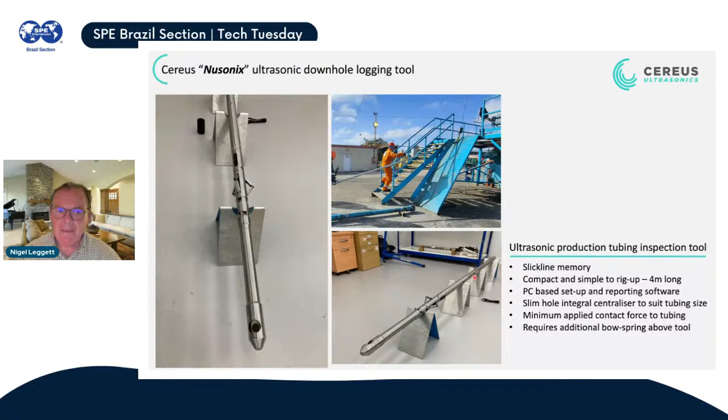So this is the actual hardware I'm going to talk about today. So it's a very simple slickline memory tool, 4 meters long. We're typically running with 2 batteries, so it's 5 meters long. The principles of its operation are similar to other ultrasonic tools that you're probably familiar with, which are bigger. We have one rotating ultrasonic transducer. This rotates at 3 revs per second, 180 RPM, and emits a pulse 60 times every revolution.

So it's the time of flight of that energy hitting the tubing wall or the casing wall, and the return. The time of flight will give us the internal radius. Simultaneously, that energy goes into the casing or the tubing wall and starts to resonate. And we get reflections coming back. That's in the time domain. And in the frequency domain, we get several of these peaks. And it's in the frequency domain we use the resonant frequency of that tubing and casing, which will give us the thickness, the absolute thickness of that tubing.

I'll go into the unique proposition of Cereus, because this is typical science of the ultrasonics tools, but the Cereus is unique in the way we actually manipulate our signals. The unique proposition of Cereus is the high fidelity ultrasonics we've achieved. Over here, this is probably an ideal signal which we would want to emit from a transducer. We would ideally want a broad band, so we're actually working between 500 kilohertz, typically up to 3 megahertz. We are going higher now, and that will give us a broad band response, allowing us to do high energy.

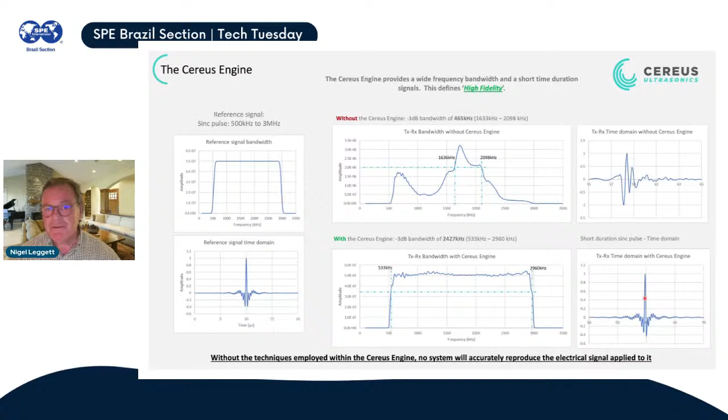Everything we do in Cereus is a direct measurement, and none of it's derived. We work with direct measurements. Now, this is just an example of a raw data set, so I'll try and explain what we've got here.

I mentioned that we rotate that transducer at 3 revs per second. Every rotation, we do 60 shots. This red line is one of those 60 shots followed over 160 revolutions. So basically 3 revs per second is about 50 seconds of data as we pull out the hole. This is time of flight along the bottom here on the x-axis.

And what we get is this is the time of flight of that first pulse hitting the tubing wall or casing wall and coming back. So that's my high intensity first return coming back. And as you can see, as we pull out the hole, we get to that point, which is a joint, and we go into a perforated joint in this upper section here. As you can see, this joint is slightly later in time, so it's going to be a slightly bigger internal diameter.

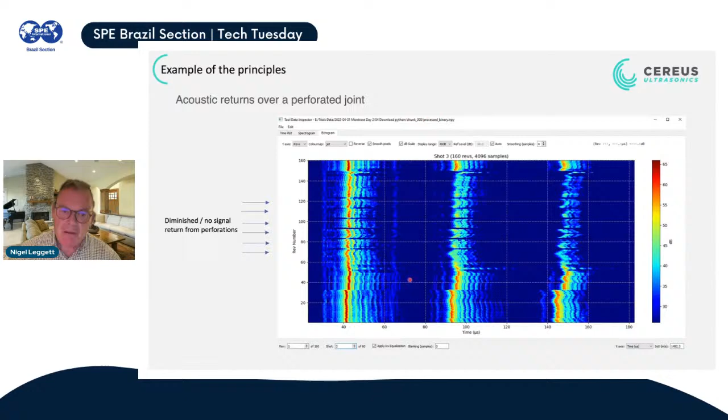So as an ultrasonic tool, we've got some case studies showing it as an alternate solution to the internal inspection of tubing and casing compared with a multi-finger caliper. Our first job was done for Total offshore, and this was a slot recovery. So inspection of a 9 5/8 casing in the upper section, where it was roughly about 65, 67 degrees, where they had already done 3 side tracks, so they were very concerned about rotary wear.

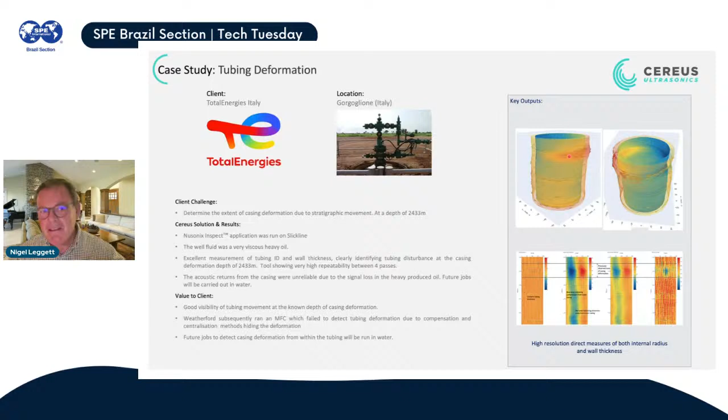And this was not detected with a multi-finger caliper because of the geometry of where the centralizer is relative to the transducer. Ours is offset by probably about 200 millimeters, which allows you to follow these distortions, whereas if you've got a multi-finger caliper, these tend to actually centralize on the fingers, and as a result, these types of distortions are very rarely detected. So this is the tool we're running in its basic mode of tubing and casing inspection to a very high degree of resolution.

The step change in this tool was its ability to become a cement evaluation tool. And it's exactly the same tool as we've been using for the tubing and casing inspection. I put this slide up because basically whenever you take a new technology to the oil field, there's always skepticism. And what we're saying about our tool is it works in the same manner. It uses the same theory as the existing ultrasonic imaging tools which have been run for the last 30-odd years in the industry.

And this is just one extract showing the principles of the existing tools on the market. You've got one rotating transducer, similar to ours, and that rotating transducer's performance and frequency response is matched to the casing thickness, because that casing thickness will resonate at a frequency. The thicker it is, the lower the frequency, and the thinner, the higher the frequency. So we select the frequency response of a transducer to fit the thickness of the casing.

This is typically the frequency range these tools run at, typically 300 to 500 kilohertz. Quite a relatively narrow band, and this is the typical response you get from a narrow band. If you remember what I showed you earlier, the wider the bandwidth you can get out of the tool, the higher the frequency you can get, the cleaner the signal. So this is typical: in the time domain, you get the pulse, the travel time, and the first reflection. Then you take a Fourier transform of that reflection into the frequency domain and get its resonant frequency. That resonant frequency allows you to determine the thickness.

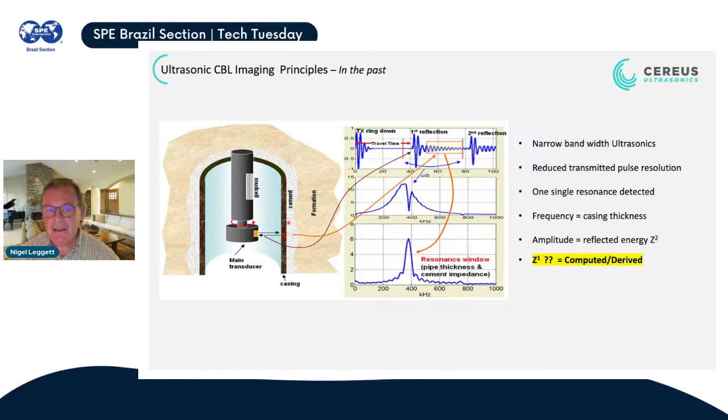So what they typically do in low bandwidth tools is take a window of these back reflections, put it into a Fourier transform and get a resonant frequency, once again the same resonant frequency as from the casing, and a combined energy level. And from that they can determine, through computations and derivations, what the material is on the back of the casing. So that's the principles today of the existing tools.

And the decay of those reflections in energy level is directly proportional or directly derived from what is sticking on the back of your casing. So if we've got water or gas, there'd be very low decay. If we've got cement, there'd be a high decay, because the cement will pull the energy out every time you get the energy hitting that back face.

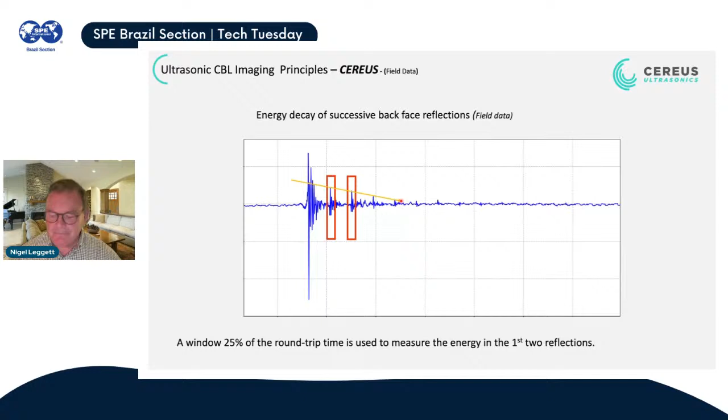Now, we've successfully used this in a number of applications. I've just shown you some samples which have undergone a hydraulic local expander. This is a technique which was developed with Shell and by Shell to close off microannuli. So it's a hydraulic tool, it's running on wireline, and actually it swages the inner casing out, compressing it in the cement to close off the microannulus.

So this is just an example of a 4.5-inch tubing in a 7-inch. These samples, they induced a microfracture. They flowed fluid through this microannulus. They then applied 3 expansions, and you can see here where they reintroduced in brown a good bond, and that was enough to seal. So this is just zooming in on that.

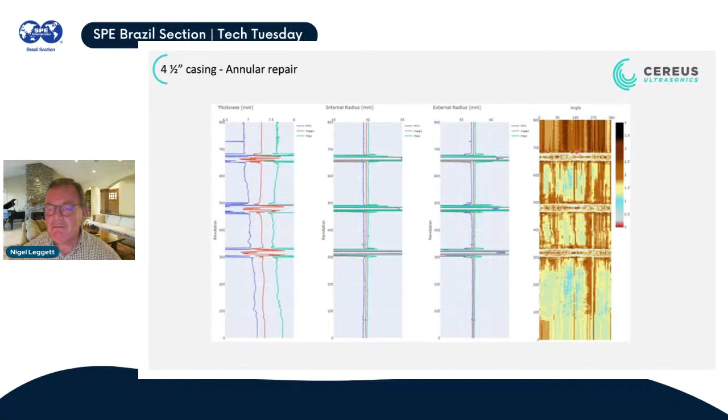We get a good trace of thickness. I'll explain these sharp points here in a minute, but basically we see a reduction in the casing thickness at that point as it's stretched and deformed, and likewise we see an increase in internal radius. And this is the resulting cement evaluation log, with the increasing of the bond or the well integrity sealing off the tips and the roots of each expansion. Just zooming in on that, you can see the red is the good bond, and what we've got is good bonds at the base of those tips and on the tips.

At the slopes, we get erroneous data, and that's what's caused those sharp peaks either side of the data set. And that's because our pulse is not coming back to our tool. Because it is at an angle, it's getting reflected and ricochets off, missing our transducer. So we fail here to get any results, but we can clearly see the seals being produced by this expansion technique.

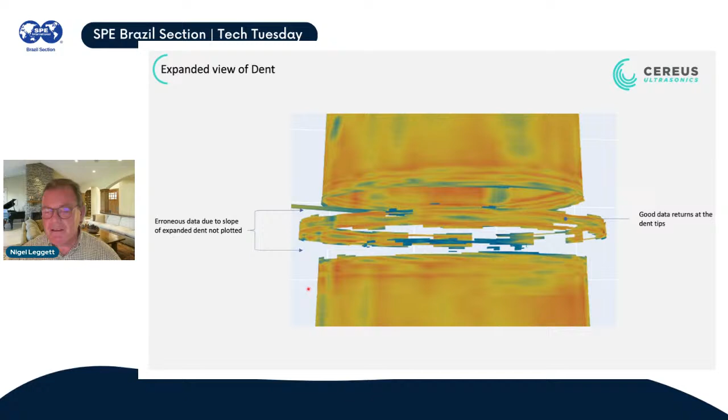Likewise, this same tool has been run in what's called the NORCE trials. This is a project in Stavanger, which is backed by numerous operators, looking at the various techniques of cement evaluation specifically and well integrity of cement for P&A operations. So this is just a direct comparison of a well-known existing tool and our tool here, the Cereus tool.

This was done 5 years ago, and the casing was pressured up to reduce the microannulus. It was pressured up to 40 bar. Ours was done at atmospheric, so we would typically see less of a bond than we would when it was under pressure. And the other thing, this sample has been repeatedly pressured up and exercised, so we wouldn't typically expect that cement bond to be the same. But there's just 2 samples of a like-for-like match with existing technology.

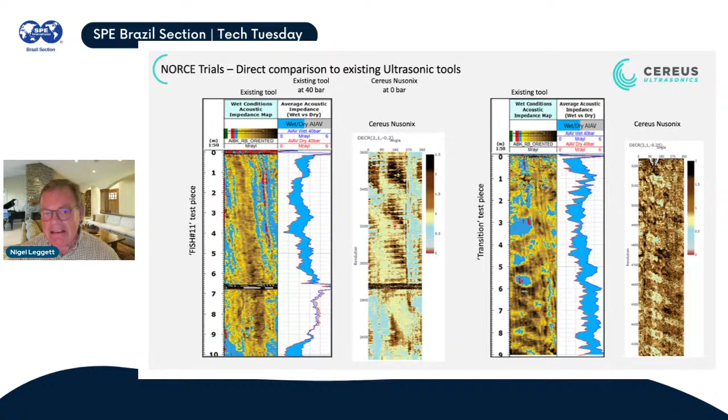So this was produced within about 20 minutes of getting the data to surface. There's no parameters or factors. There's no post-analysis. This is all a direct measurement. All we simply need is the speed of sound of the fluid it was sitting in, and the rest of the information is obtained from that tool.

This is an interesting one. This is a sample where the tool is sitting in a casing with a microannulus. So it's a single point, but we're watching that single point. So it's a single rotation of the tool over time. So this is 3,000 revolutions we've got as the tool sits in a casing which is being pressured. We're increasing the pressure on the casing.

So coming over here, the 3D, you can see the microannulus. We see some good bonding at 0 pressure here. And as we progressively increase the pressure, we can see the bonds getting bigger and coming down to this plot here. As we increase the pressure, we progressively increase the bond index. And this is 0 to 60, 60 to 120. You can see there we're going from a light brown to a brown.

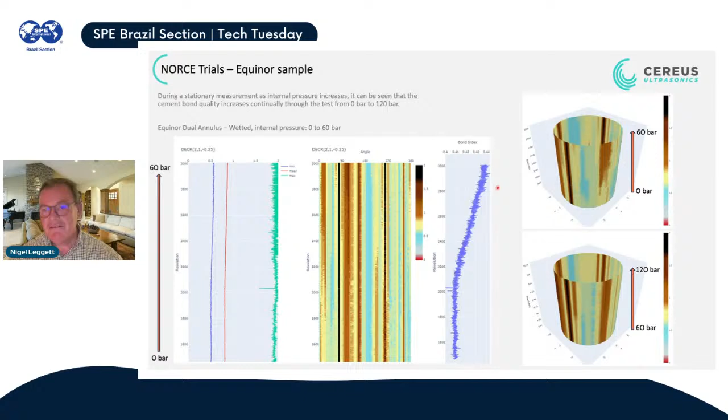And interestingly, there's other areas where actually the bond gets worse. So we do see the blue in some areas get worse as the pressure increases. But as you see, the bond index increasing as we apply pressure. So you just see the sensitivity of our tool on the detection.

This is an interesting one, just proving the performance of the tool in a sample where we've got multiple scenarios. So this is drilled holes next to the casing. So it's very similar to hydraulic lines put down the side of the casing. So we've got good bonds. We've got some vertical lines here where they've got their holes drilled. We've got the bad bond.

Once again, we're seeing a bad bond. We are seeing some areas. And then we have good bond. Now, this is a good bond. In fact, it had been repeatedly exercised, and probably it's not as good a bond now as it was when it was first produced. And interesting, the free pipe, we're showing some areas. When they drained this sample, they still had some samples of barite in there. So there was some reason for these apparent good bond markings here.

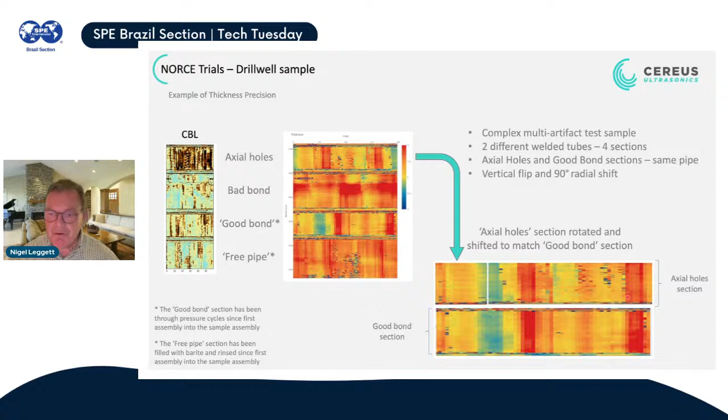The interesting thing here is that this was made up of 4 segments of casing, and 2 of the pieces of casing came from the same original tube. And you can see the sensitivity on the thickness. We've almost fingerprinted the casing thickness. If you can see this section and that section, if you invert that top section and rotate it radially, you get a perfect match. And that sensitivity, I think, is just over a millimeter from the blue to the red. It just proves how sensitive this tool is at thickness measurements.

Now, most tools today, as I said before, you select a frequency response of your transducer to match your casing. And as I said, the thicker the casing, the lower the frequency. The problem is, at the cutoff, when you get too low a frequency, you're going to get such poor results because you just haven't got the high frequency component. You just haven't got the resolution required. So typically in ultrasonic tools, you've got a cutoff of about 0.8 of an inch in thickness.

And this is where we were asked to look at a thick wall casing and see how good our tool is at carrying out a CBL in a thick wall casing, which is extensively used where you've got tectonic movements and salts, for instance. So this is a 10-inch, 25 millimeter thick casing. And this sample, they made for the yard test, and they put various components in which they didn't tell us about. They filled it up with relatively fresh cement and asked us to log it. And this was our response.

So we clearly saw we had a fairly fresh cement, but you can clearly see the top of cement here. But more importantly, you can very much see the control lines and the hoses which they had installed in that casing. We have successfully gone through 42 millimeters. So with our technology, the thicker the casing, the better. So that's just proving the point. It's a very versatile tool, and there's no reduction in the resolution the thicker the casing.

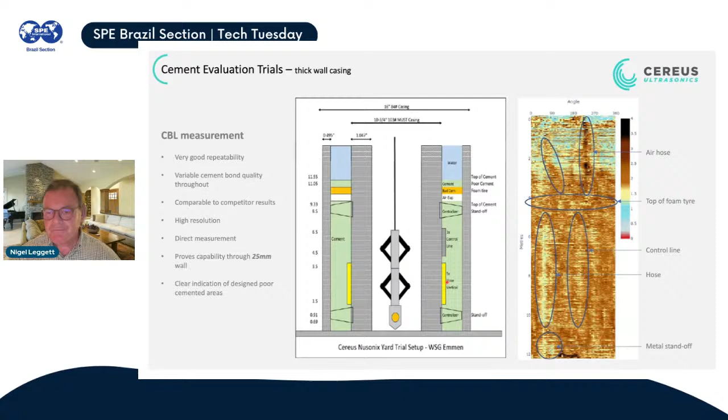So that's where we are today. That tool is now commercial. We've got tools operating in North America, Australia, tools going to the Middle East. So that tool is already available today.

And where we're going in the future with this technology is the capability of doing a through tubing CBL. So that's the ability for us to actually measure. There are through tubing CBLs available, but the through tubing component is they can run through tubing and then start measuring once they've gone through the tubing. What we're trying to develop here is a technique of actually being inside tubing and doing a CBL on the next casing. So it allows you to do a CBL casing assessment without pulling the tubing.

And once again, it's this Cereus engine I spoke about earlier that allows us to do this. So not only do we effectively manipulate the reference signal, so once it's gone through the transducer, it's a perfect signal. We can actually distort the signal and transmit and receive to make components acoustically disappear.

So that's the technique. And it's a similar way as a whale manipulates its voice when it talks to its partner. It will actually send a reference signal, its partner will return that signal back, and the original whale will say, right, I've sent that signal, I received this signal, so I've now got to distort my voice to compensate for the attenuation in that acoustic path through the seawater, in attenuation and in phase. And we do something which is very similar. We manipulate the input signals to correct for all the distortions going on in the transducer, in the water, through a steel plate and back again.

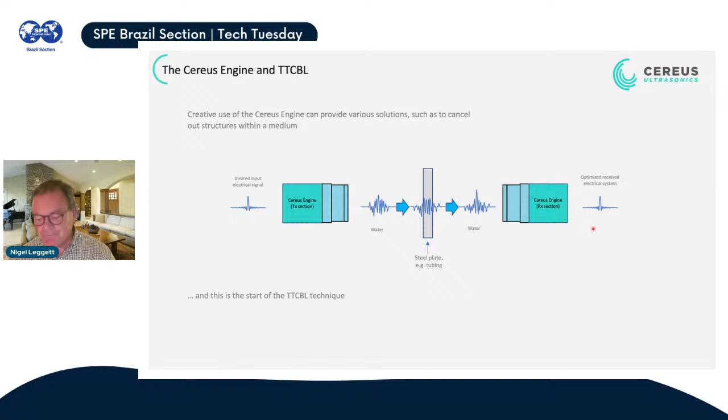So this is the scenario. Here we've got a tubing which is thicker. We've got a transducer below a 20 millimeter thick tubing. We've got a standoff of 100 millimeters, and then we've got a casing, which in this scenario is between 10 and 20. But I'll just show you the pulse. So the transducer emits a signal which hits the plate. It emits from the surface of the tubing, so the transducer is in contact with the tubing. We get this signal, the pulse is emitted.

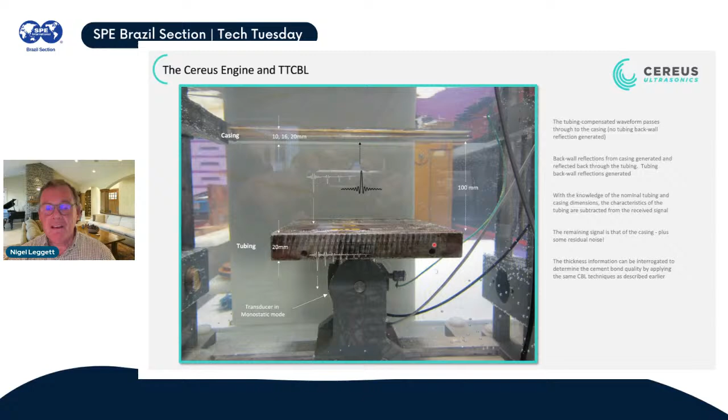It bounces off, and we get the first return, the same as what we've shown you before. The first return comes back, and then the back reflections. Those back reflections hit the initial tubing. It comes through the tubing, so we get another combination of back reflections. But if we know what we've sent, we can subtract that from what we receive, so we just get the clarity of those back reflections. It's all to do with how we acoustically remove this first surface, which allows us to achieve this.

And this is a field example of this, where we've got the transducer up against a casing, so it's rotating around, but it's offset, so it's very close to the casing. As you can see, this is one rotation here. At this point here, we're very close to the casing, and then we're very far away. And then we're looking at the next casing here, so we get the back reflections from the next casing. When we look in the time domain, we get these reflections here. We go into our frequency domain, we can see these back reflections, and they're reducing. So this is just showing you the clarity of the data we get in the field.

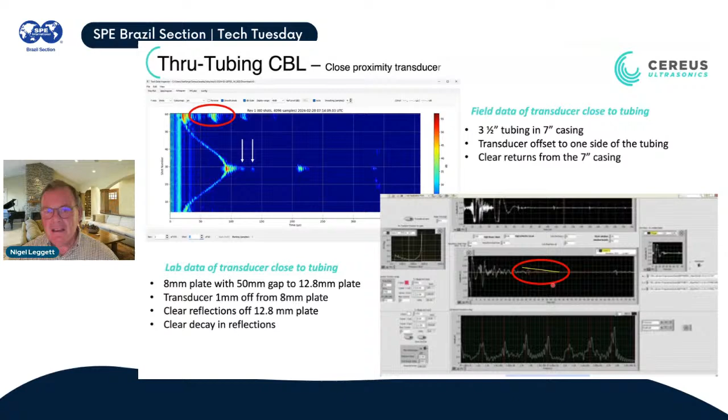Invariably, we get better data in a wellbore than we do in our tanks, in our laboratories. But it's already showing that the techniques we've developed in the tanks are working in the downhole environment. But it does require us to put the transducer within a very close proximity to the first tubing wall. So we're working on this. We hope by the middle of next year we will be releasing for field testing a through tubing CBL.

Likewise, this is just showing you the multi-casing detection. This is the same tool as we've shown you before, run in various modes, where once again, this is one rotation of the tool. So you can see we're not sitting centrally in this tubing, but we are starting to detect the outer casings. So this is all the imaging coming from the outer casings. Another example here.

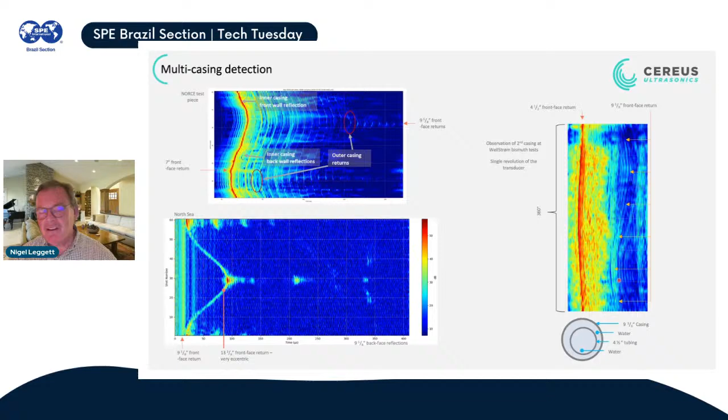And this is a clearer one to see, where we've got a 4.5-inch tubing in 9 5/8, where it's more centralized. These are at 60 odd degrees, but we can clearly see the returns coming in from the next casing. So it allows us to do an inspection of the subsequent casing and also give you a position. So quite useful for when you're cutting and pulling casings, knowing the position of your tool and your casings in one another.

The other thing is, with all ultrasonics, there is a component of thickness on the cement. And we see it more visibly on our tool because we've got such high resolution measurements of thickness. But you can actually see in this case that there is on the CBL some artifacts of the thickness.

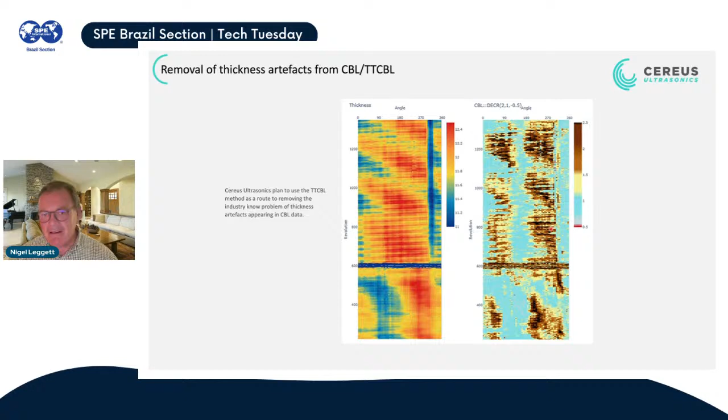And you can see the stripes of the manufacturing of the casing, but this typically is a typical thickness plot you'll get from a tubing or casing inspection. And there are some overlying effects coming into the CBL. This happens to all ultrasonic tools. We have got techniques now which we're adding to this tool to reduce that effect. So that's the end of my presentation on high fidelity ultrasonics.